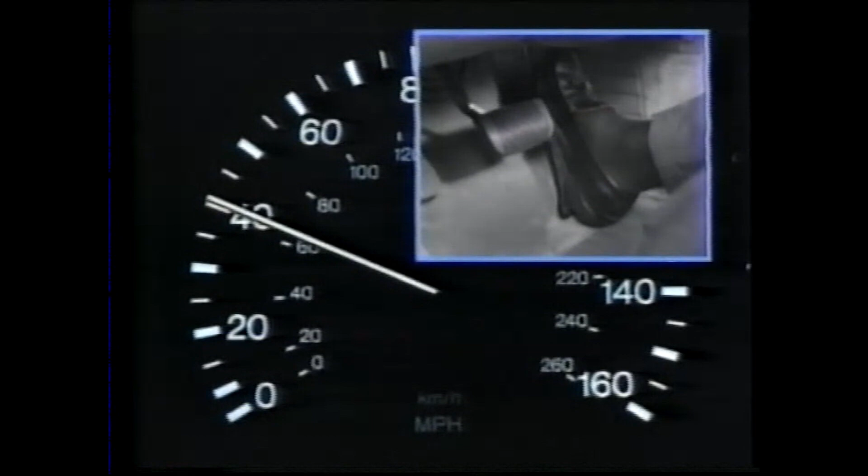Of course, you can also change the set speed by depressing the brake pedal or accelerator pedal to bring the vehicle to the desired speed, and then reset it with the set switch.

If you pull the control lever toward you, operation of the cruise control system is temporarily canceled. In addition, operation of the cruise control system can be temporarily canceled by depressing the brake pedal. In a vehicle with a manual transmission, operation is also canceled when the clutch pedal is depressed.

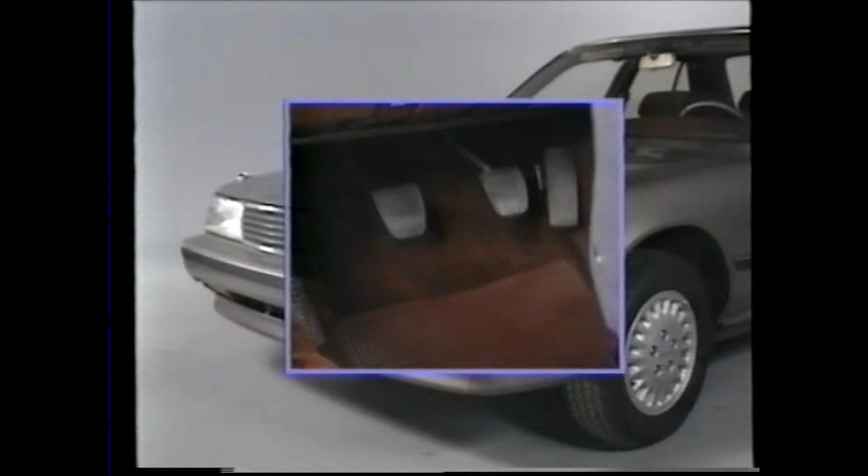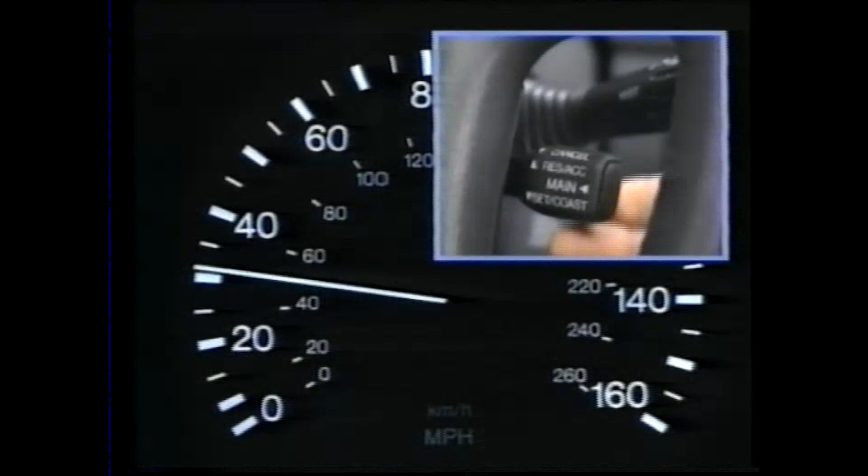Even after cancellation, the set speed remains in the memory, so if you use the resume mode, that is, lift the lever up when you wish to drive again using the cruise control system, the vehicle will return to the set speed.

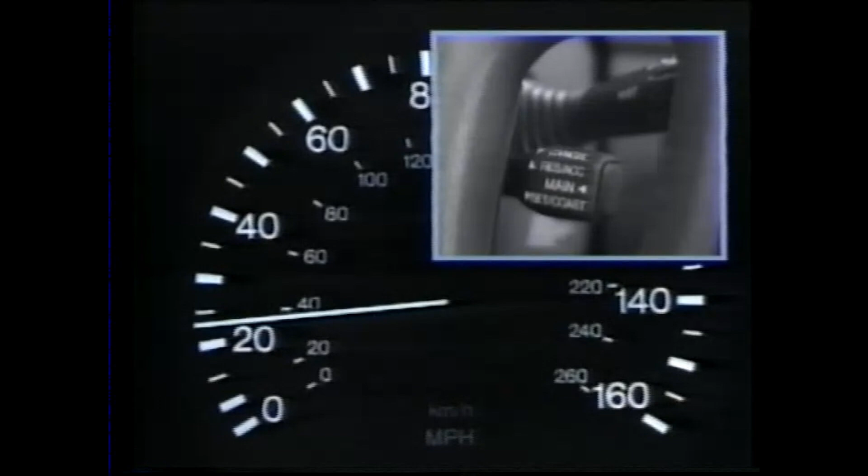However, the set speed will be erased from the memory if the actual vehicle speed falls below 40 kilometers per hour. If this occurs, the resume function will of course not operate.

Let's take a look at the components of the cruise control system. The main components are the cruise control ECU,

the actuator, the main and control switches, the speed sensor, and the combination meter.

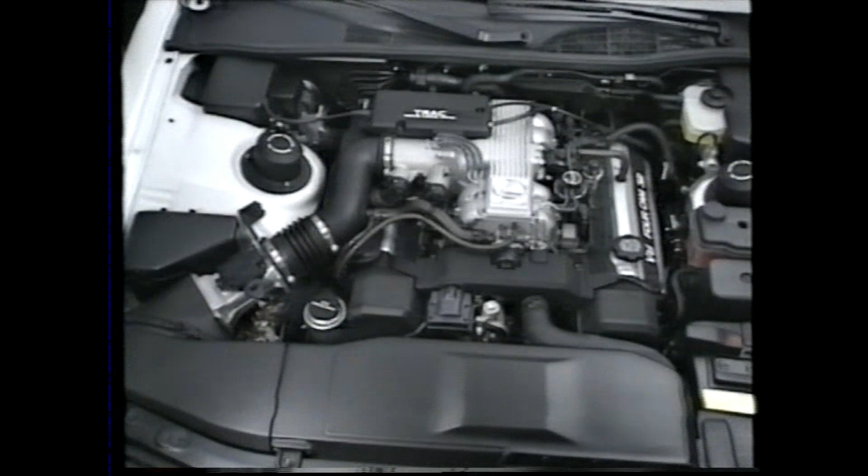The cruise control ECU is located on the left cowl side panel. The actuator opens and closes the throttle valve according to the signals from the ECU.

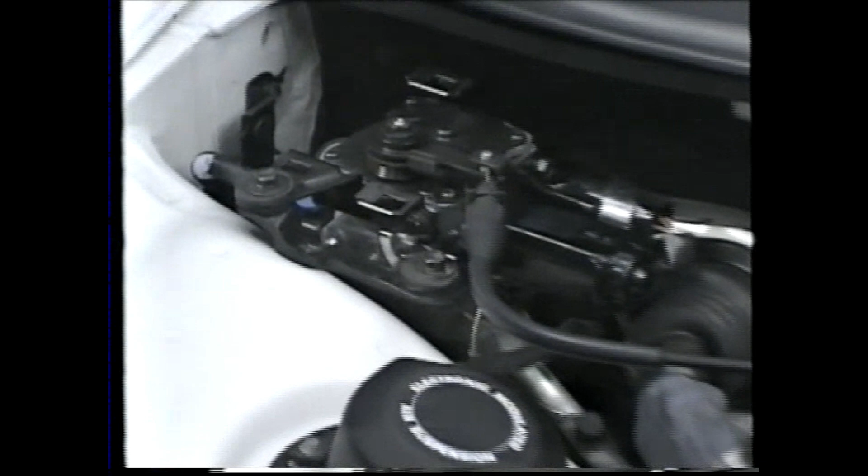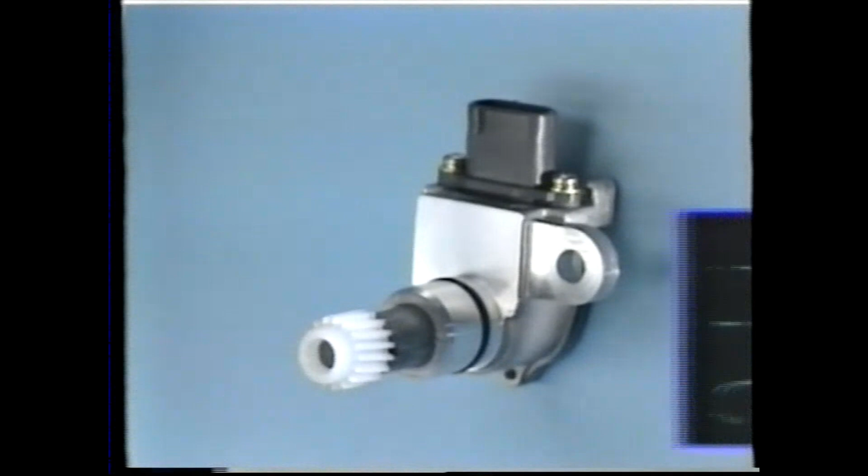The speed sensor generates a signal depending on the speed of the vehicle. 20 pulses from the speed sensor are converted to 4 pulses in the combination meter and sent to the ECU.

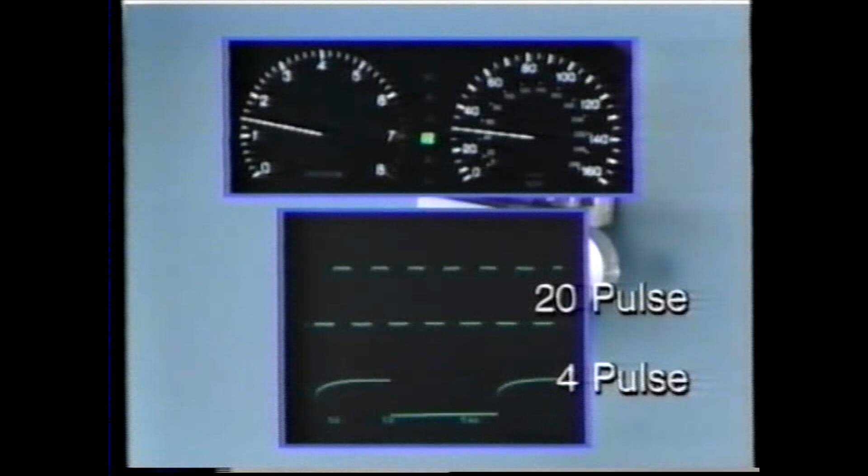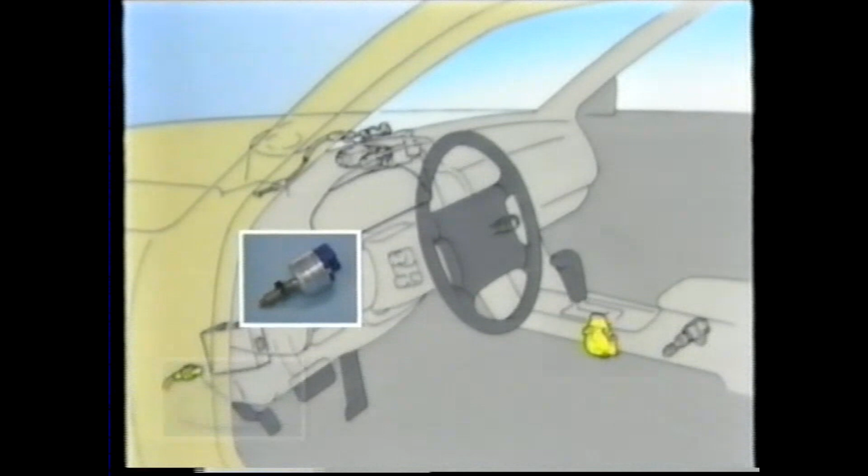In addition, the stoplight switch, the neutral start switch, and the parking brake switch can be considered component parts of the cruise control system because when any of these switches go on, operation of the cruise control is canceled.

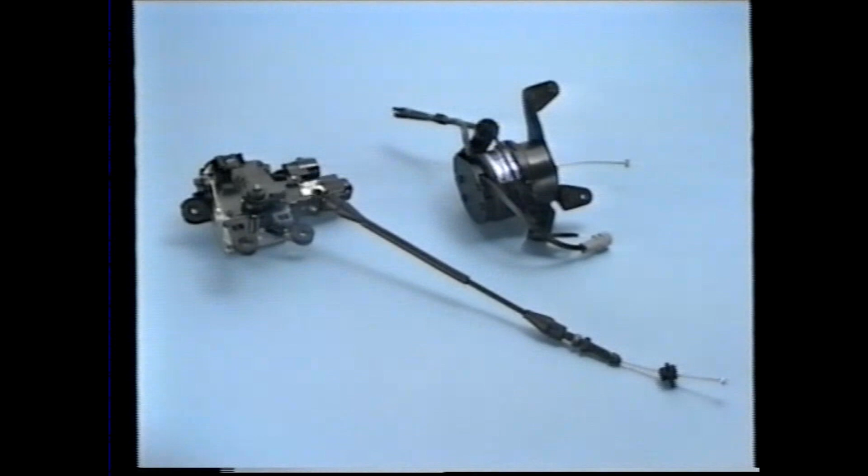Now let's look at the operation of the cruise control system. There are 2 types of actuators, a motor-driven type and a vacuum-driven type.

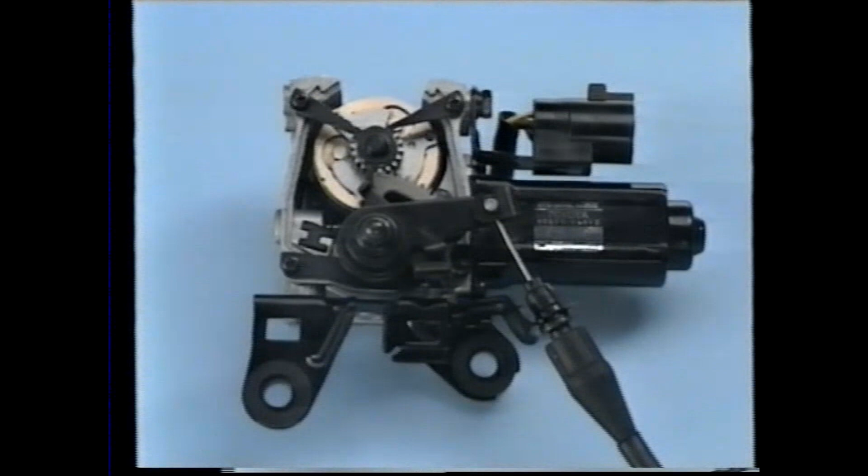The actuator used in the LS400 is the motor-driven type. The motor-driven type actuator is made up of a motor with a safety magnetic clutch, a potentiometer, a control arm, and so on.

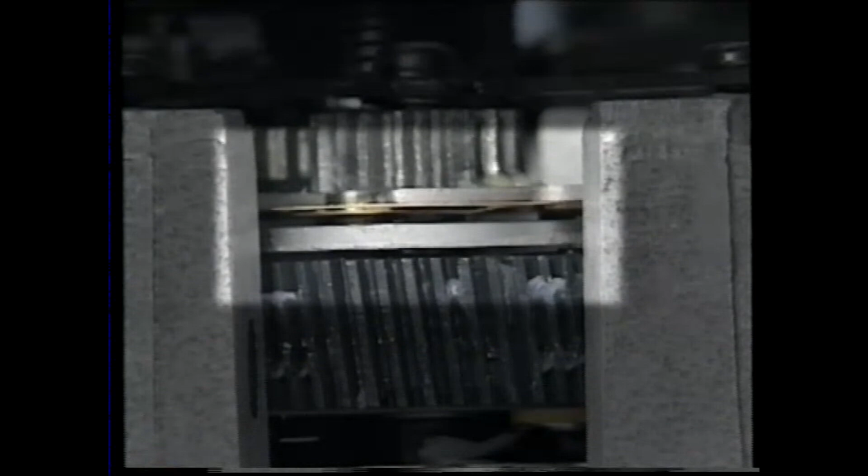The function of the safety magnetic clutch is to connect and disconnect the motor and control arm as necessary. When the cruise control system is switched on, the clutch engages, connecting the motor and control arm when electrical current flows from the ECU.

Also, when the brake pedal is depressed, or when the ECU senses a malfunction in the cruise control system, current to the safety magnetic clutch is interrupted, and the clutch disengages, breaking the connection between the motor and control arm.

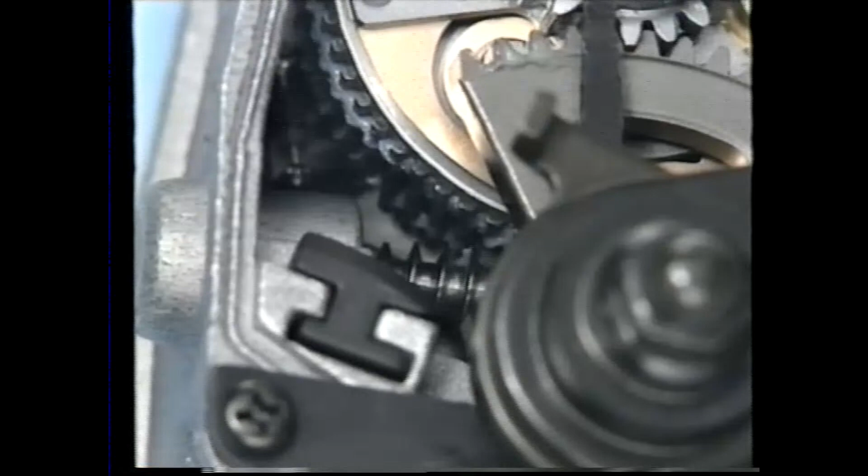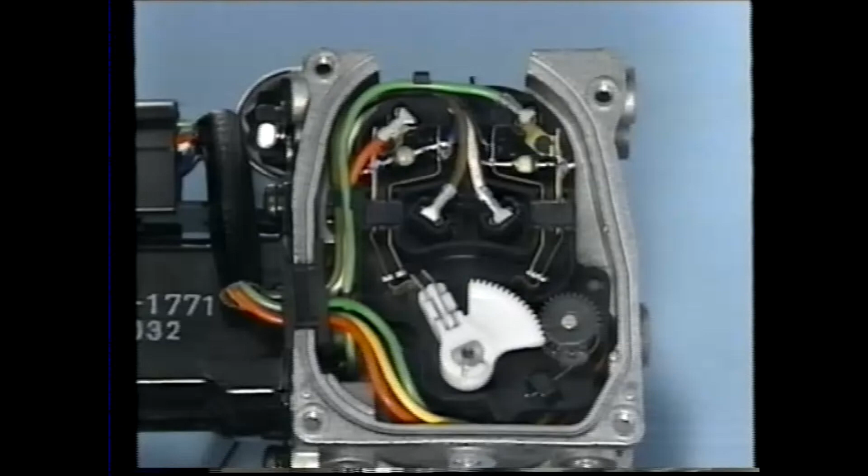The motor rotates in both directions, so it can control both acceleration and deceleration of the vehicle. In addition, there are two limit switches built into the motor to protect it.

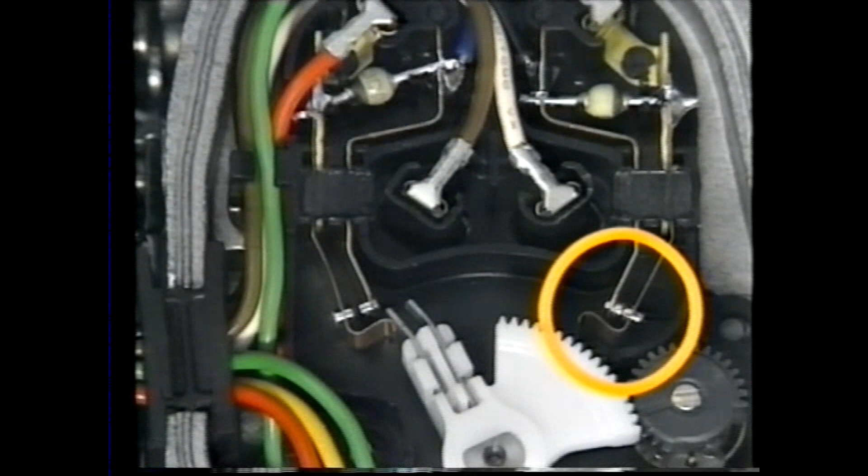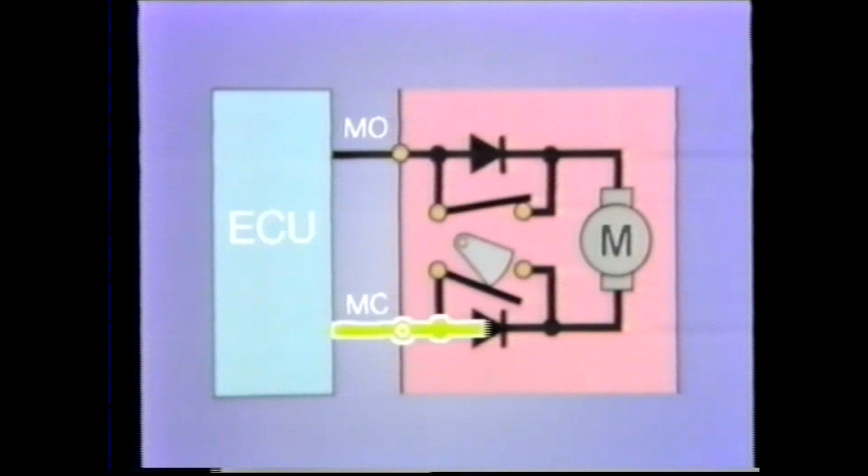When the system is not operating, the limit switch on the MC side is closed, and that on the MO side is open. When the motor begins to rotate in the acceleration direction, the switch on the MO side closes. When the throttle is fully open, the switch on the MC side opens and motor rotation stops. When the motor begins to rotate in the deceleration direction, the switch on the MC side closes. When the throttle is fully closed, the switch on the MO side opens and motor rotation stops.

The control arm is connected to the throttle valve via cables. When the vehicle is not being controlled by the system, the cruise control cable is free. On the other hand, when driving with the cruise control system, the cable connected to the accelerator pedal is free.

The potentiometer detects the opening angle of the control arm. The signal output by the potentiometer is used to control the motor and to monitor the control arm position for the self-diagnostic function.

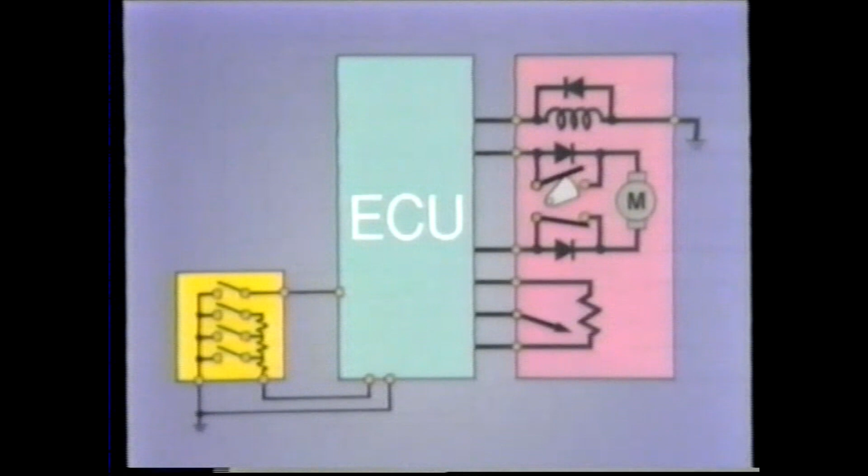Next, let's look at the operation of the cruise control system by means of a circuit diagram. When the main switch is turned on, current flows to the relay in the ECU, and the ECU begins to sense the vehicle's speed. However, current does not yet flow to the actuator motor and safety magnetic clutch.

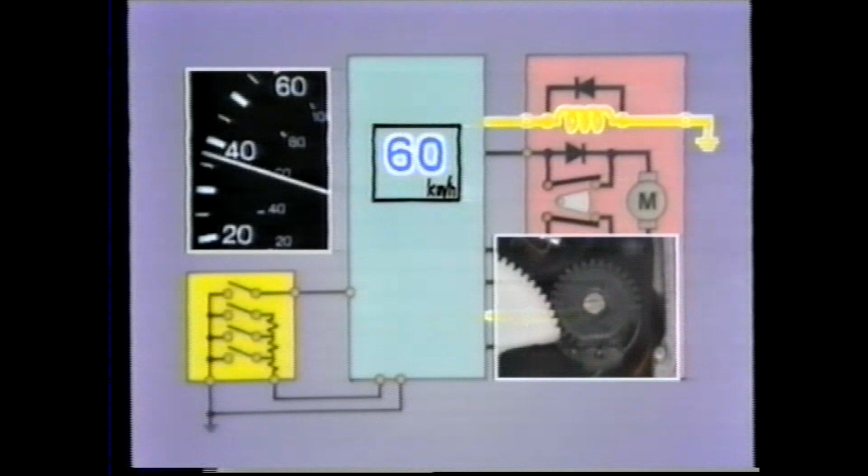The speed is set in the ECU's memory when the set switch is pushed and released. At the same time, the safety magnetic clutch is activated and motor rotation is transmitted to the control arm and potentiometer. At this time, the potentiometer sends a signal to the ECU according to the opening angle of the throttle valve.

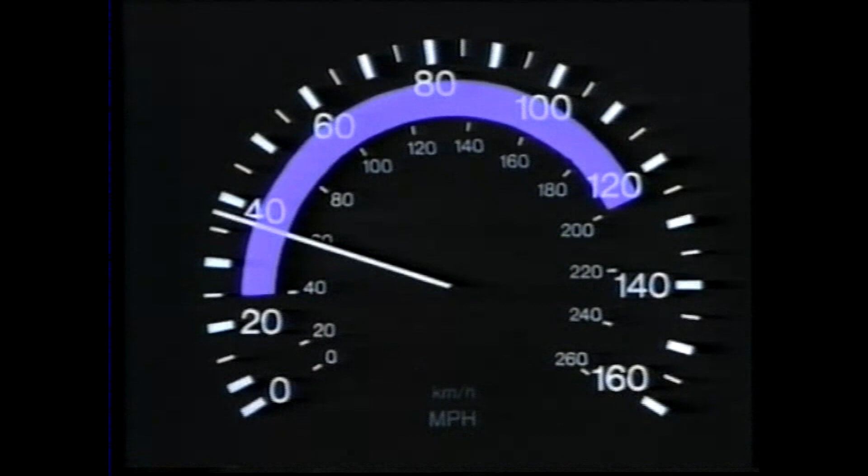Speed can be set anywhere in the range between 40 and 200 kilometers per hour. The ECU compares the actual vehicle speed sent from the speed sensor with the set speed and opens or closes the throttle valve accordingly. For example, if the actual vehicle speed falls below the set speed, it opens the throttle valve, while it closes the throttle valve if the actual vehicle speed exceeds the set speed. By continuously performing this operation, the cruise control system keeps the vehicle at the set speed.

When the vehicle is driven up a hill, its speed will fall. When this occurs, the cruise control ECU sends a signal to the engine and transmission ECU, ordering it to downshift to third gear in order to keep the vehicle at the set speed. When the vehicle returns to the set speed, the transmission upshifts back into overdrive.

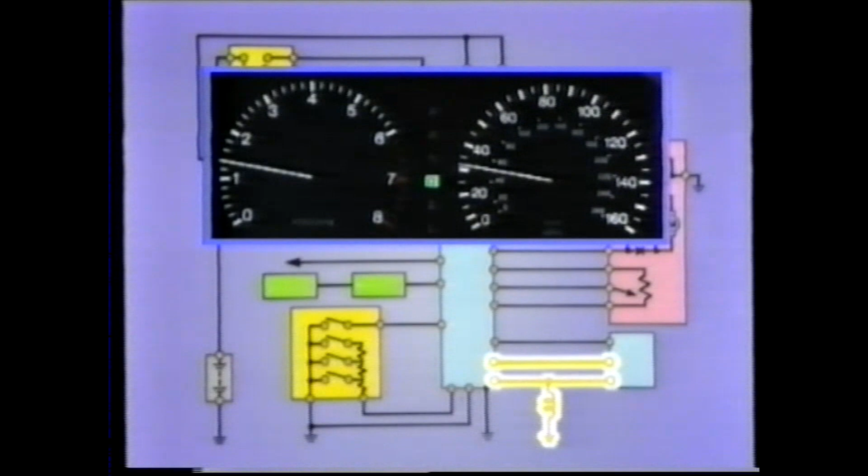Remember that when the cruise control system is operating while the ECT is operating in the power mode, the ECT is automatically switched to the normal mode regardless of the status of the driving pattern select button.

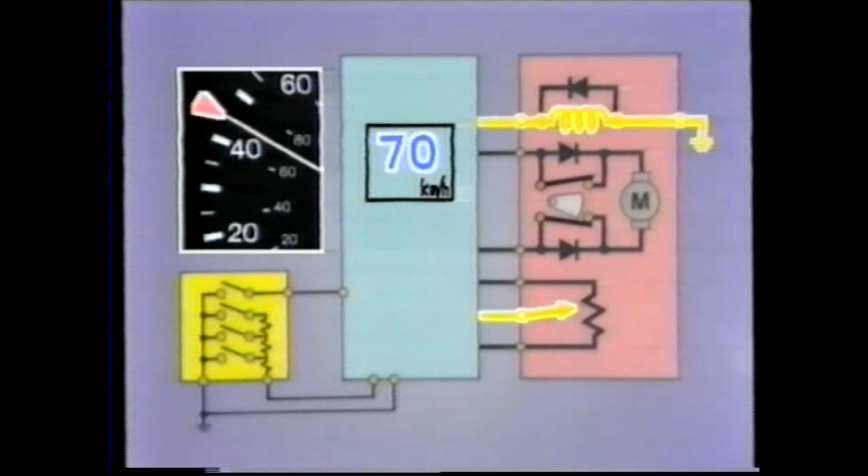In the accelerate mode, the actuator motor rotates in the acceleration direction and speed is increased. When accelerate is turned off, the ECU saves the speed at that moment in its memory as the set speed. In the same way, in the coast mode, the actuator motor rotates in the deceleration direction and speed is reduced. When coast is turned off, the ECU saves that speed in its memory as the set speed.

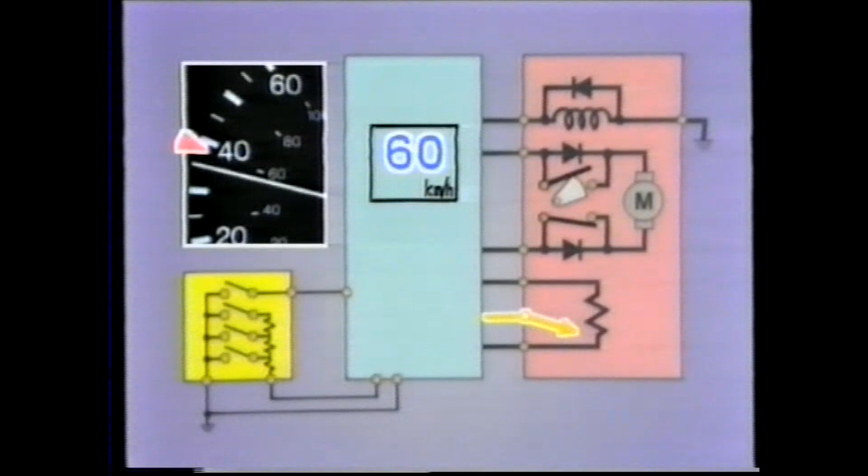When the control lever is pulled toward cancel, the cruise control ECU immediately releases the safety magnetic clutch in the actuator to stop operation of the cruise control system. At the same time, it rotates the motor to fully close the throttle valve.

The cruise control system is also stopped in the same way when a cancel signal is received from the stoplight switch, the neutral start switch, or parking brake switch.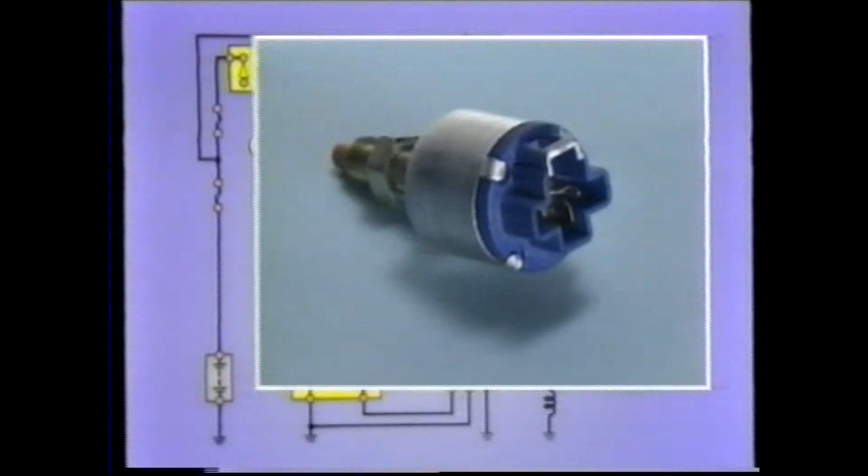There are actually two switches in the stoplight switch, which control two different functions at the same time. One switch goes on when the brake pedal is depressed, not only to turn on the brake lights, but also to tell the ECU that the brakes have been applied so that the ECU can stop operation of the cruise control system.

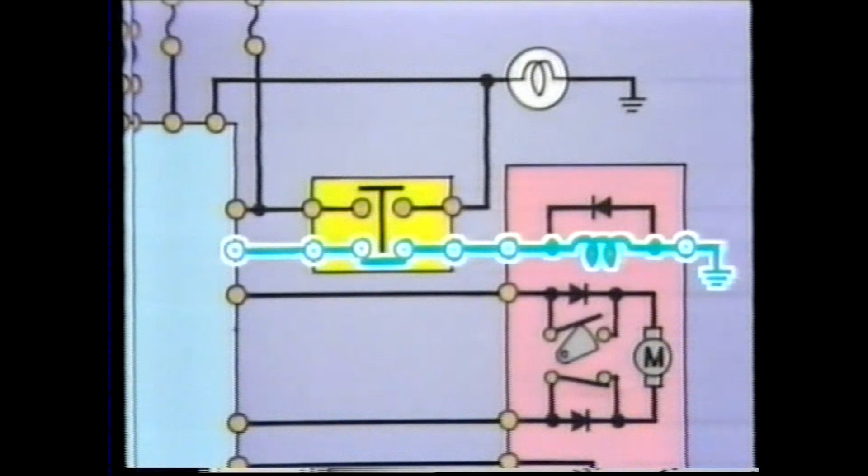The other switch mechanically cuts the circuit between the actuator's safety magnetic clutch and the ECU and disengages the clutch to stop control by the cruise control system. At this time, the set speed is still saved in memory so that the original set speed is resumed if the resume switch is turned on and then released.

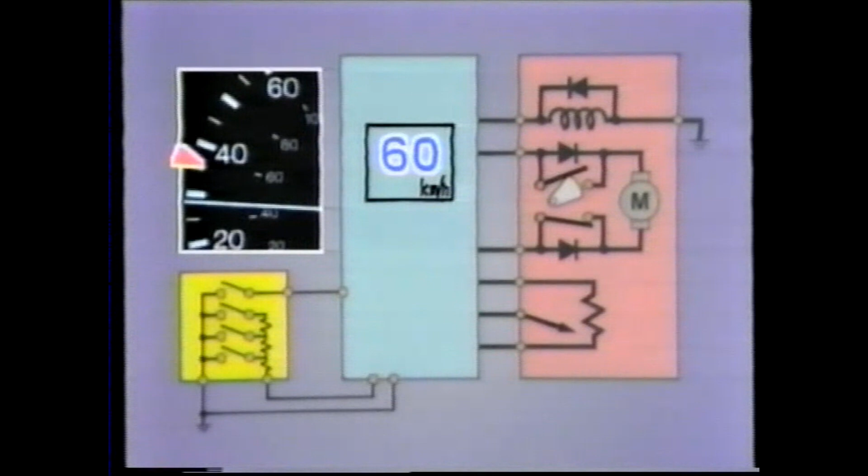Once the actual vehicle speed falls below 40 kilometers per hour, operation is canceled and the set speed is erased from its memory.

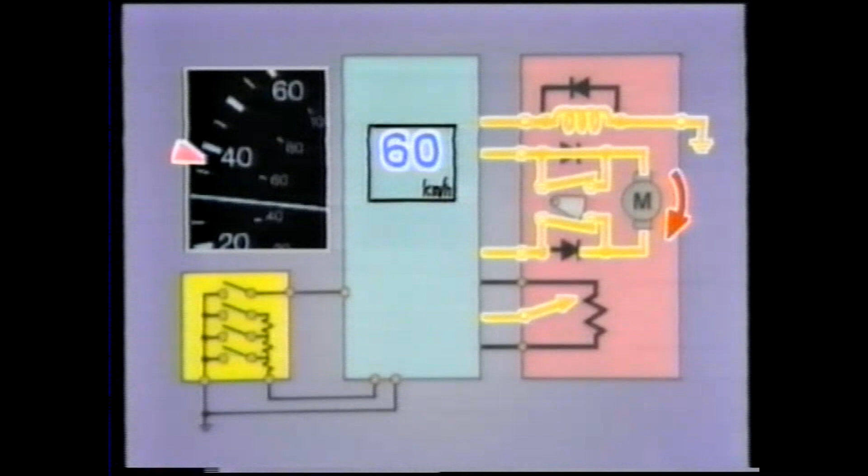In addition, if the actual vehicle speed falls 16 kilometers per hour below the set speed while the cruise control system is in operation, operation of the system is canceled and the set speed is erased from its memory. The resume function is not effective at this time.

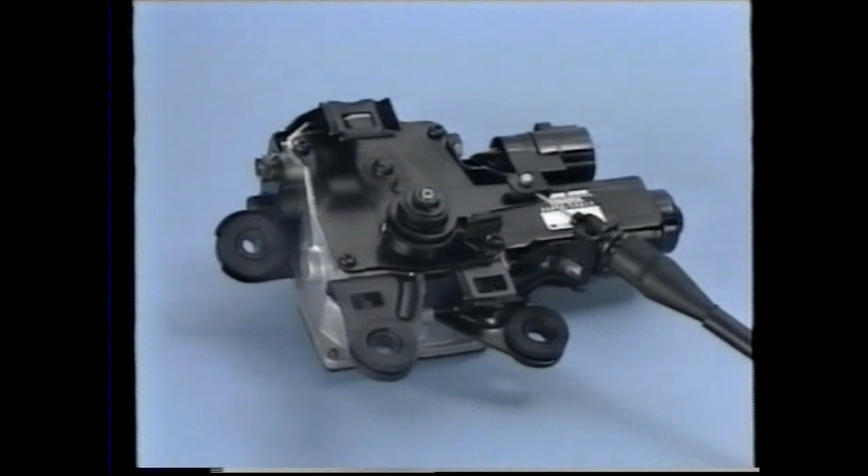The foregoing has been an explanation of the motor-driven type actuator. Now let's take a short look at the operation of the vacuum-driven actuator.

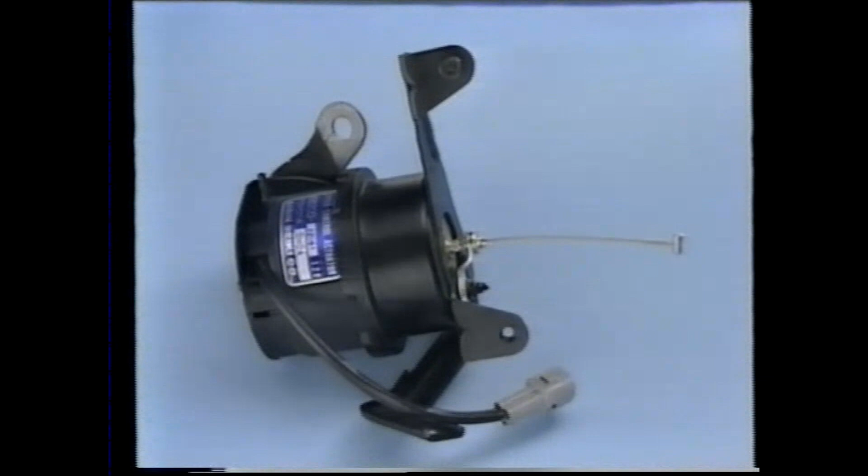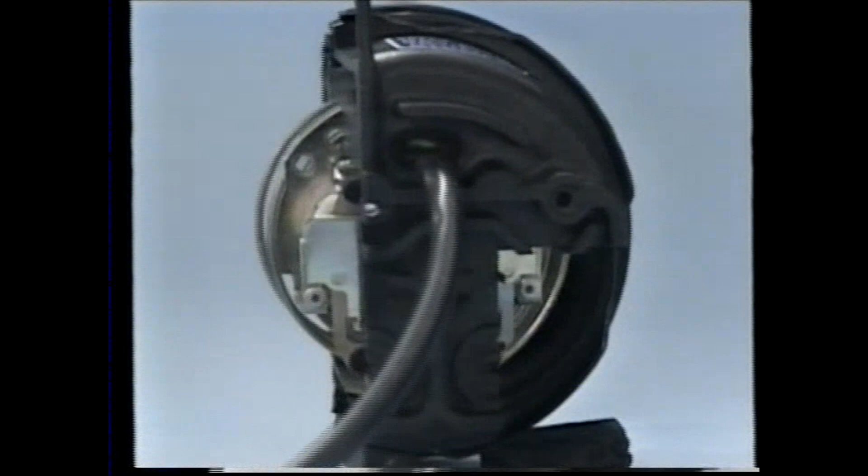The vacuum-driven actuator has a control valve, a release valve, a diaphragm, and a return spring. The control valve is used to draw either atmospheric air or vacuum into the actuator. When current flows to the control valve, the passage through which atmospheric air flows is closed, and the passage for intake manifold vacuum is opened, creating a vacuum in the actuator.

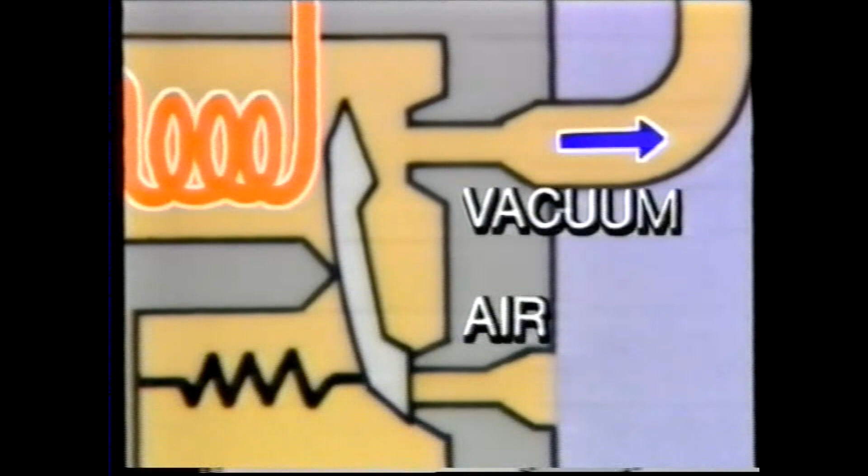When the strength of the vacuum exceeds the force of the return spring, the diaphragm moves inward. As a result, the throttle valve connected to the diaphragm via a cable is opened and the vehicle accelerates.

When current flow to the control valve stops, atmospheric air enters the actuator. The diaphragm is therefore pushed back by the return spring and the throttle valve is closed. The strength of the vacuum in the actuator is regulated by the length of time that the current flows to the control valve.

The ECU compares the actual vehicle speed with the set speed and varies the ratio of time that this current flows in order to regulate the opening angle of the throttle valve.

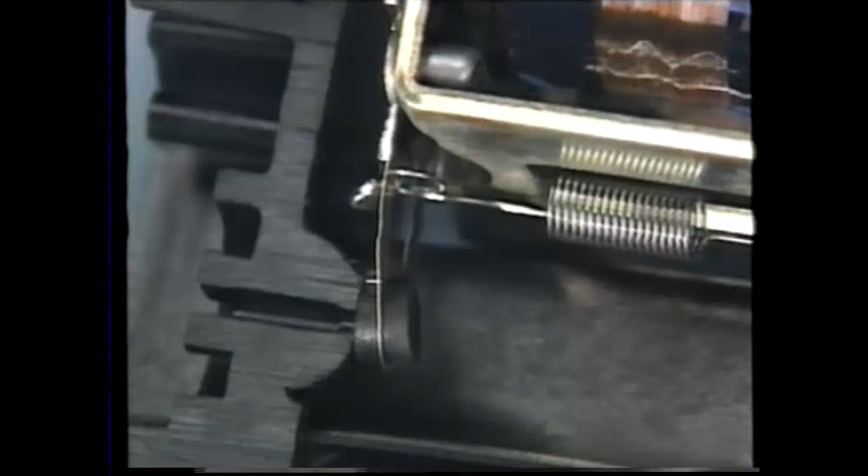When operation of the cruise control system is canceled, the release valve lets atmospheric air into the actuator, causing the throttle valve to close instantly.

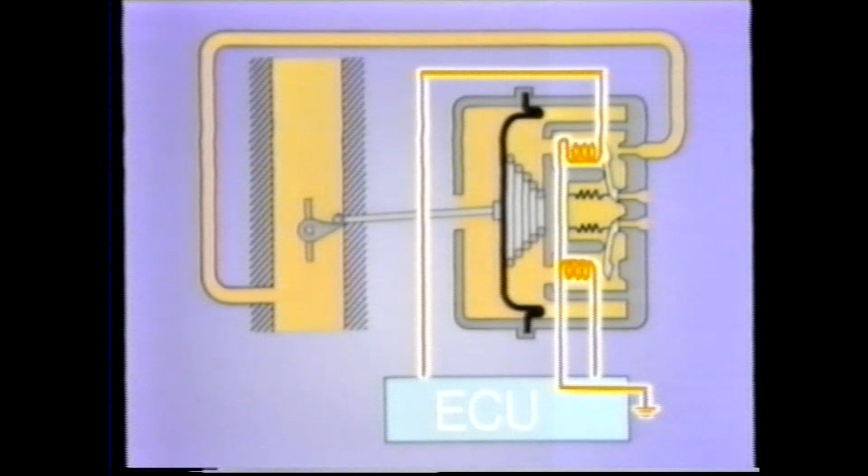When current flows to the release valve, the passage for the flow of atmospheric air is closed. When the operation of the cruise control system is canceled, current to the release valve and control valve stops and atmospheric air enters the actuator. As a result, the diaphragm is pushed back by the return spring and the throttle valve is released.

The cruise control system has a self-diagnostic function. If no signal comes from the speed sensor and the ECU detects a system malfunction, cruise control system operation is canceled and the indicator light blinks 5 times, then turns off in order to inform the driver of the system malfunction.

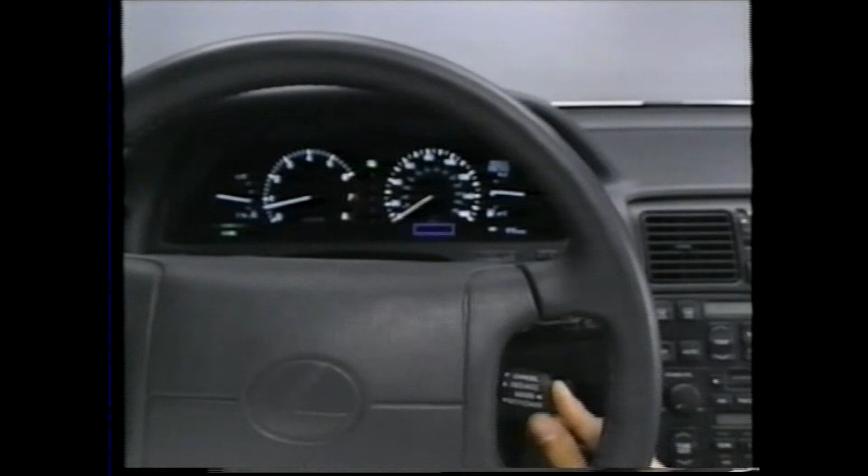The cause of the malfunction is saved in the memory of the cruise control ECU. At this time, the cruise control system does not operate even if the main switch is turned on. However, once the ignition switch is turned off and then on again, the system will operate when the main switch is pressed again.

The cruise control ECU of the LS400 has a backup power source, so the cause of the malfunction will remain in the ECU memory even if the ignition switch is turned off. On other models, it is erased when the ignition switch or main switch is turned off.

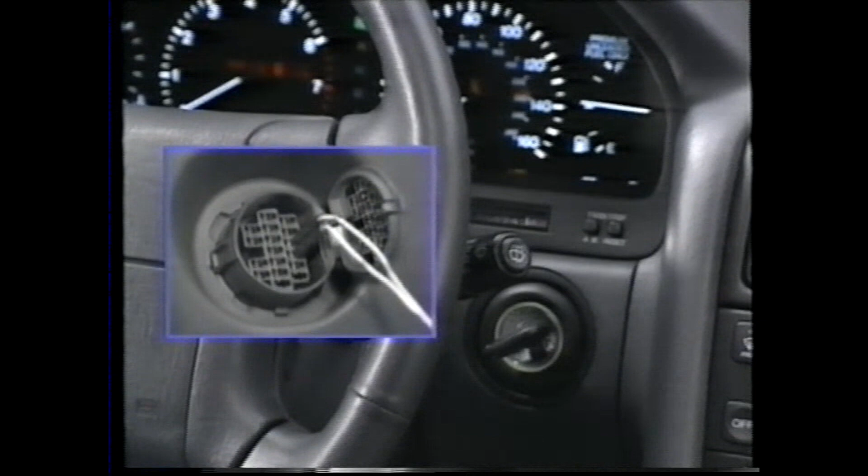With the ignition switch on, connect terminals TC and E1 of the TDCL or check connector. This will allow you to find out the cause of the malfunction by counting the number of times the indicator light blinks.

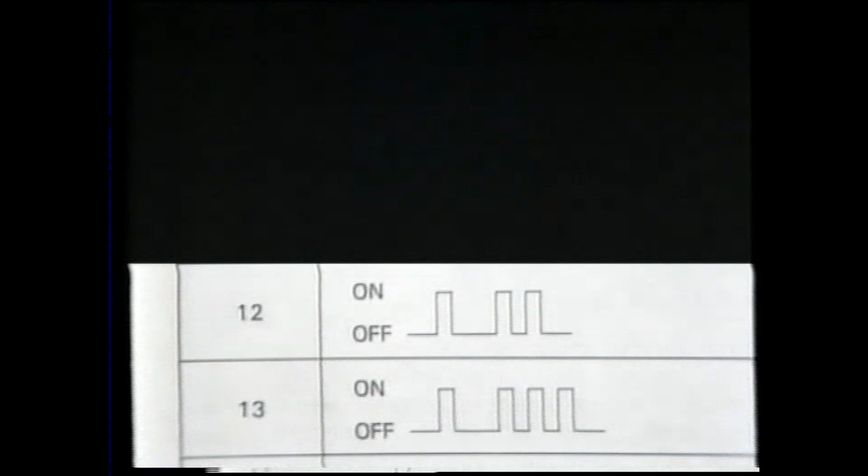Here you see codes 12 and 13. Code 12 means open circuit in the safety magnetic clutch, and code 13 means potentiometer output signal is abnormal, or open circuit in the motor output circuit.

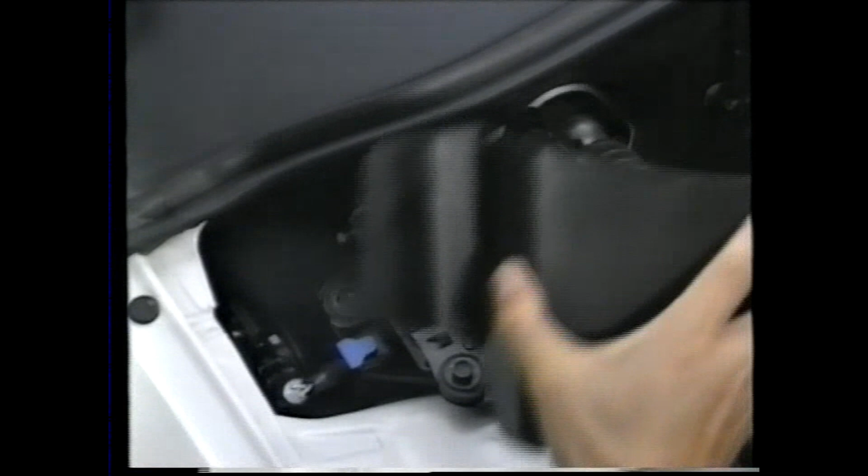Let's check the actuator. As you can see, the connector is not connected. After remedying this, remove the dome fuse to clear the memory.

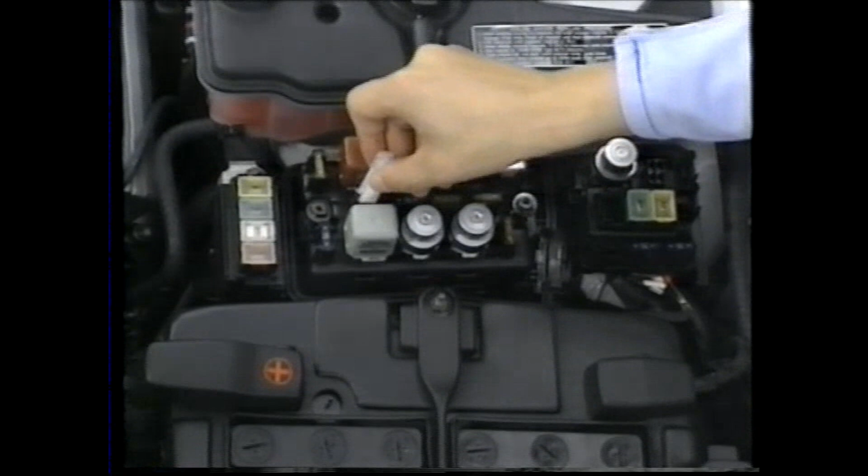Now look at the diagnostic codes again. The normal code is now shown.

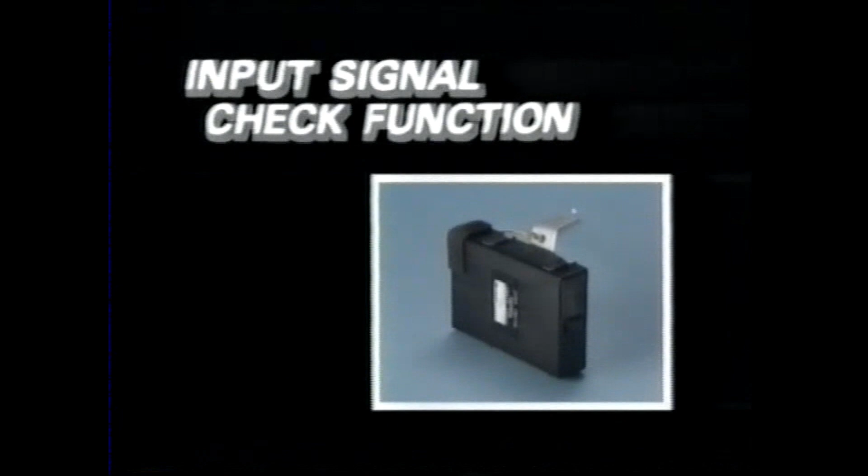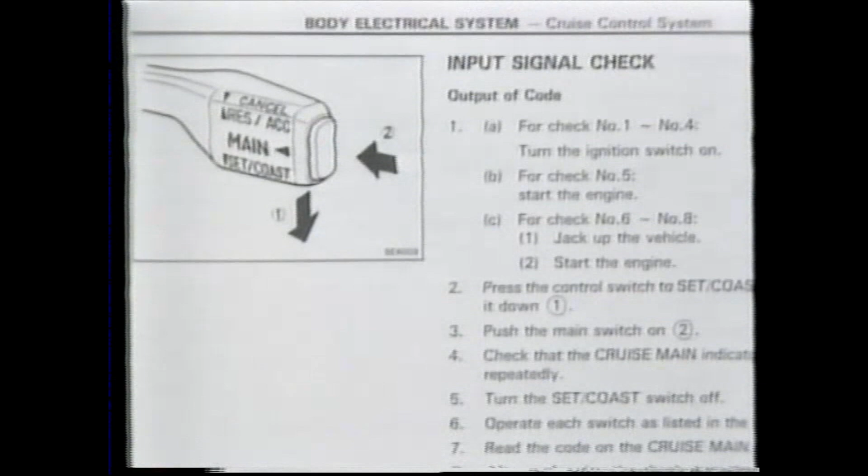The cruise control ECU also has an input signal check function. Let's take a look at that now. This function checks whether or not signals for all control switches and the stoplight switch, parking brake switch, neutral start switch, and speed sensor are being input correctly into the ECU.

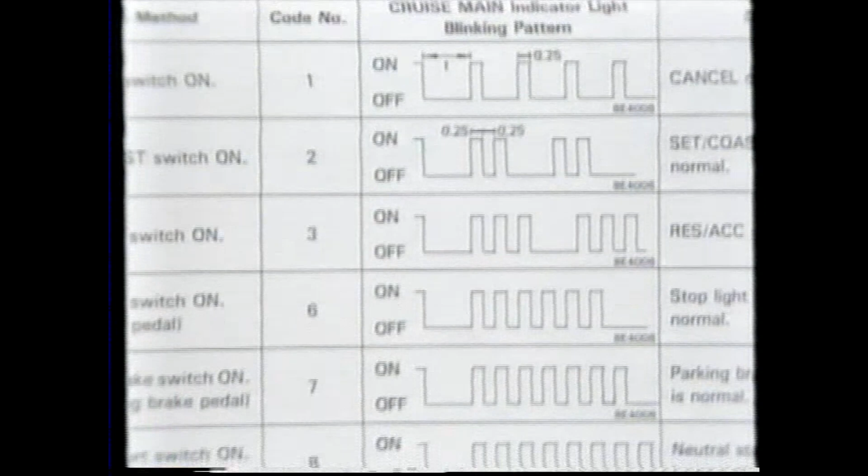Let's try it. Turn the ignition switch on and turn on the main switch while pushing the control lever down, that is, turning on Set Coast. At this time, the power indicator light blinks twice. This sets the ECU in the input signal check mode.

First, pull the control lever toward cancel and hold it. If there is no malfunction in the cancel switch circuit, the power indicator light will blink once. And it blinks twice when you push the control lever towards Set Coast.

Next, it blinks 3 times when you push the control lever toward Resume Accelerate.

It blinks 6 times when the brake pedal is depressed. Next, jack up the vehicle and start the engine. If everything is normal, the light blinks 7 times since the parking brake has been depressed. When we release the parking brake, it blinks 8 times.

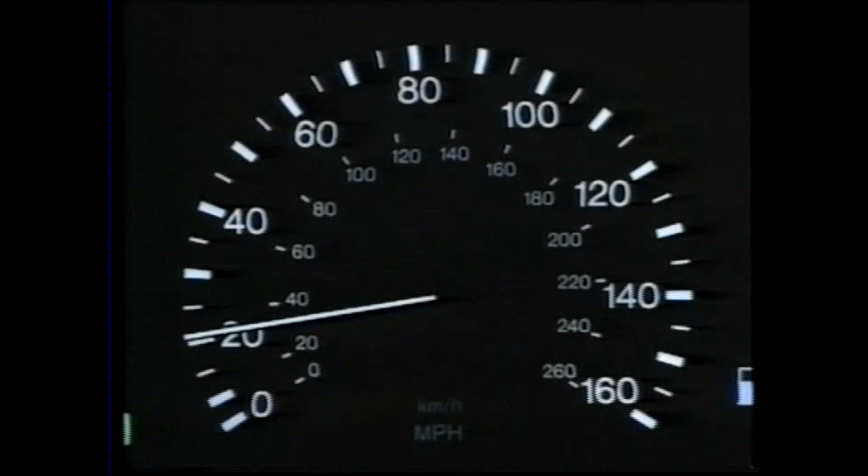The reason for this is that the shift lever is in the N or P range. If we shift to the D range, it remains lit. When we drive at 40 kilometers per hour or faster, it begins blinking, so the speed sensor circuitry is normal.

When the main switch is turned off, the input signal check mode is canceled. The foregoing was an input signal check.

The LS400 also has a cancel signal check function. The ECU stores the cancel signal that last canceled the operation of the CCS, so you can find out the cause of the cancellation by checking which cancel signal is in the memory.

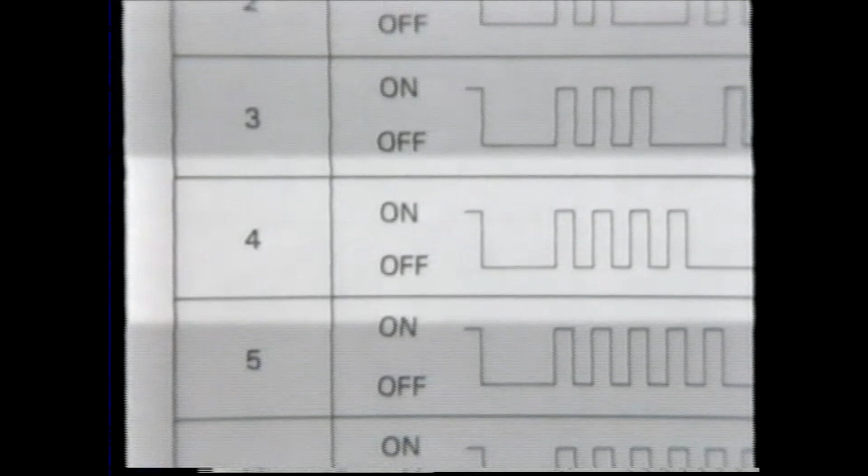Let's try it. Turn the ignition switch on, then turn the main switch on while pulling the control lever toward you. The cancel signal is indicated by the blinking pattern of the power indicator light. This blinking pattern means that operation of the system was canceled by the stoplight switch signal. If the main switch is turned off, this display disappears.

Now let's take a look at the cruise control system checker. The CCS checker can be used for off-vehicle diagnosis. It can be used to check the operation of the power supply, the main switch, the indicator light, the input signals, and the actuator.

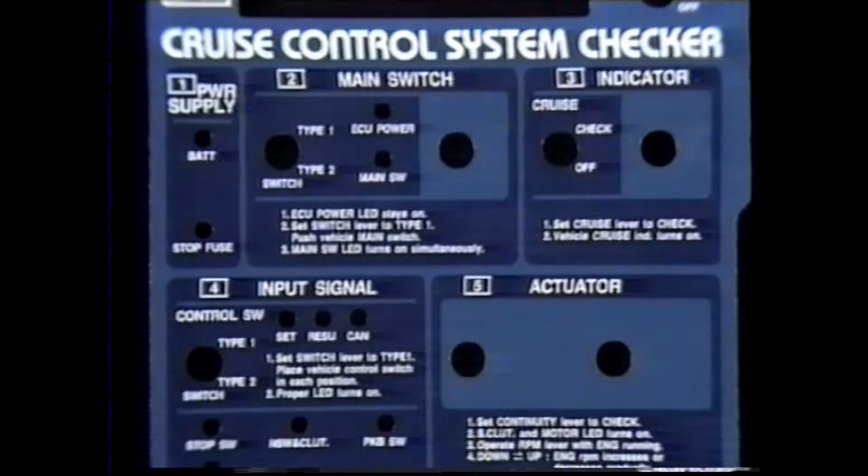Let's look at the circuits that can be checked on the diagram. First is the power supply. The circuit from the battery to the ECU battery terminal, and the circuit to the ECU STP Plus terminal can be checked.

Next is the main switch. The circuit from the ECU CMS terminal to the ground point can be checked. And then, with the ignition switch on, the ECU B terminal circuit from the battery can be checked.

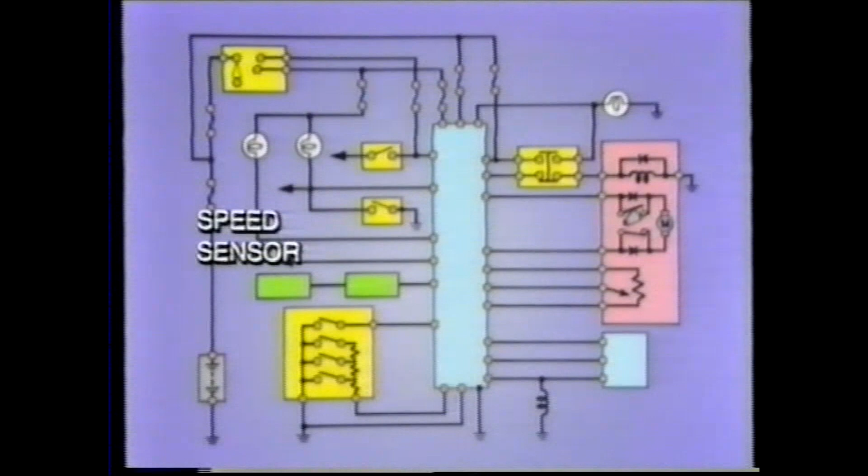For the indicator, the circuit from the battery to the ECU PI terminal via the cruise control main indicator light can be checked. For input signals, checks of the circuits of the cruise control switch, the stoplight switch, the neutral start switch, and the parking brake switch, and of the speed sensor signal circuitry, and so on, can be made.

On-board diagnosis of the actuator circuit is not possible, so here we'll check it using the CCS checker.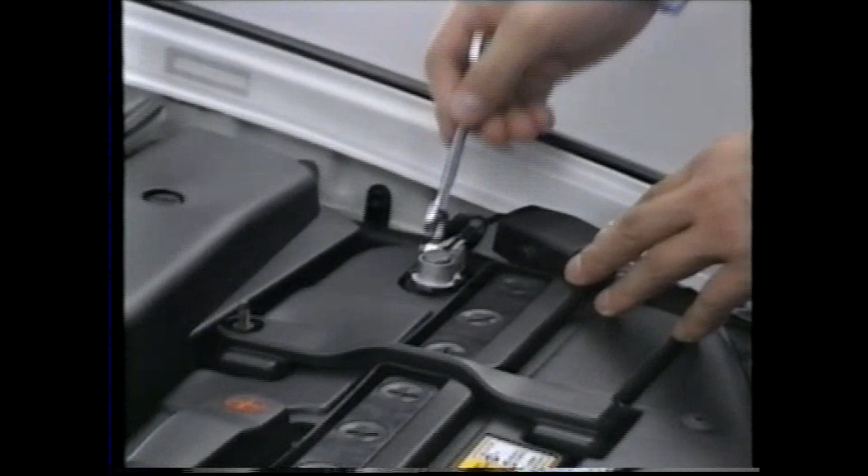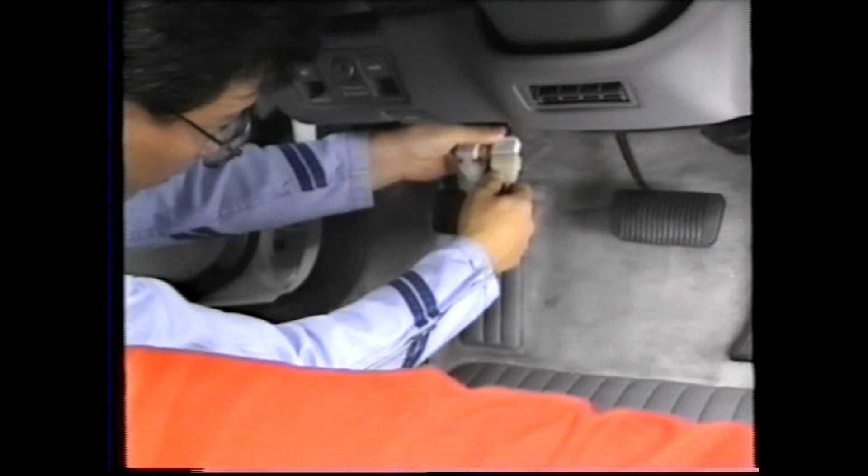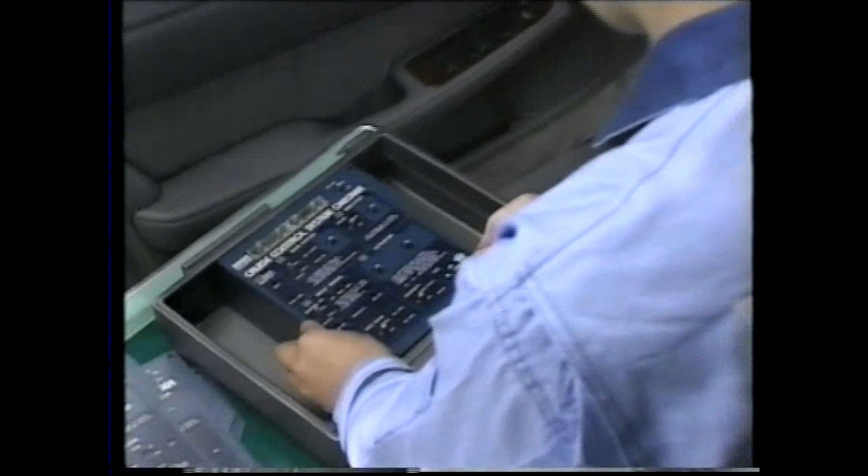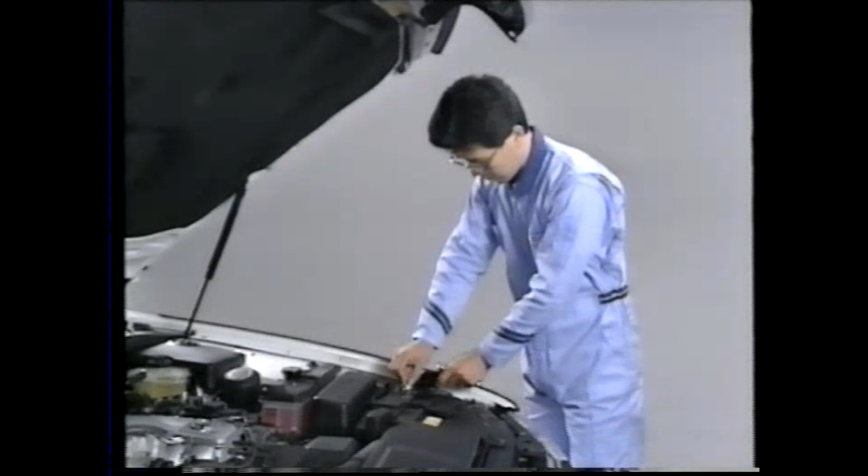First, remove the negative battery terminal. Next, disconnect the wire harness from the cruise control ECU and connect the sub-wire harness to the wire harness. Lay the LS400 checker sheet over the CCS checker and connect the sub-wire harness. Now connect the negative battery terminal, and that finishes our preparations.

First, make an LED check to see if the checker itself is okay or not. Set the LED test switch to test. If all LEDs light up, it is okay.

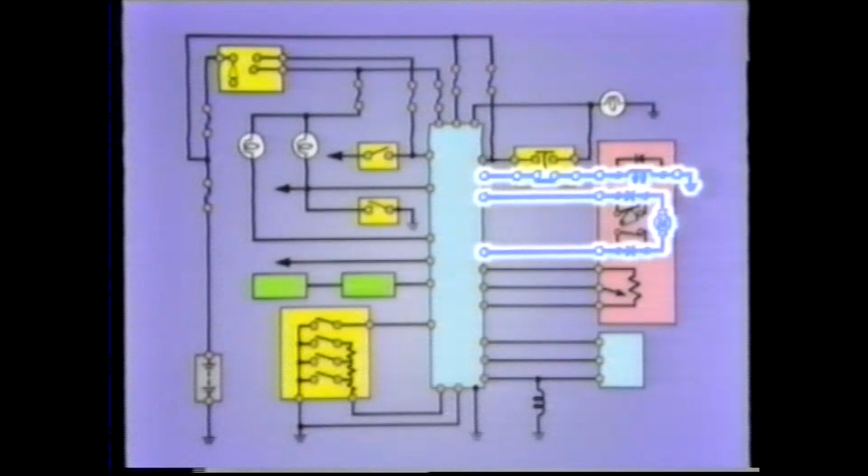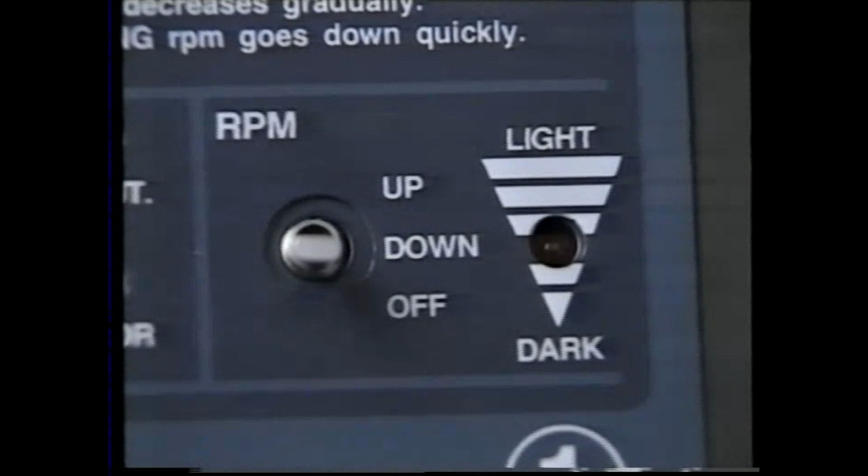Now check the operation of the motor and safety magnetic clutch. Turn the ignition switch on. Confirm that the RPM switch is in the off position and set the continuity switch to check. If the S clutch and motor LEDs light up at this time, the circuit is normal.

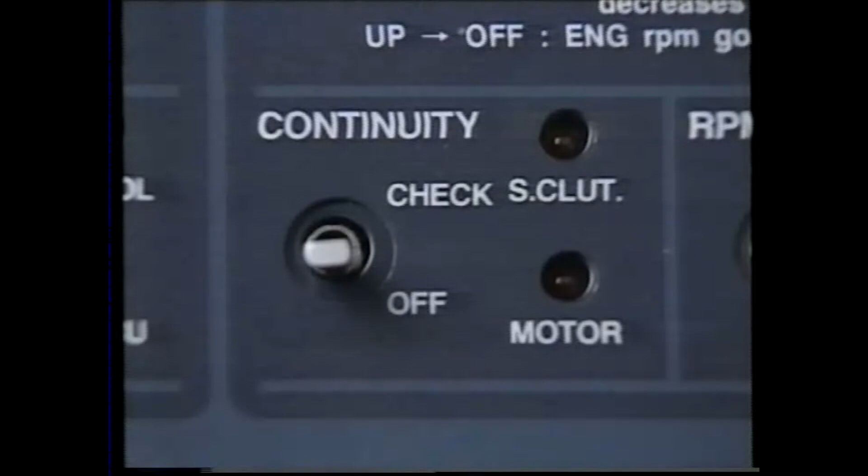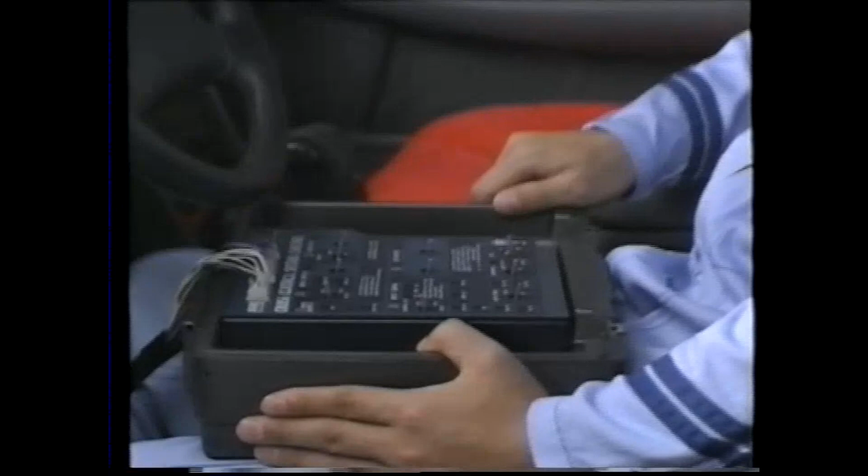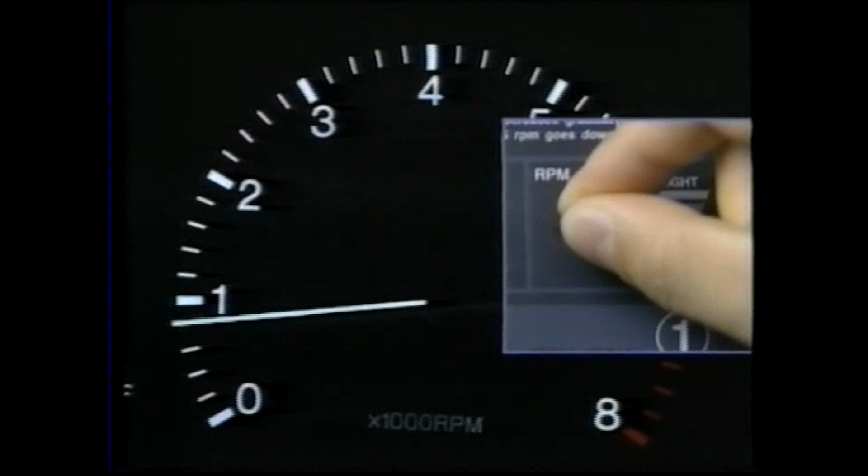Next, start the engine and check the operation of the motor and safety magnetic clutch. With the RPM switch set to up, they are normal if the engine RPM increases. When it is set to down, they are normal if the engine RPM decreases gradually. Be careful: the tachometer should not go into the red zone when doing this test.

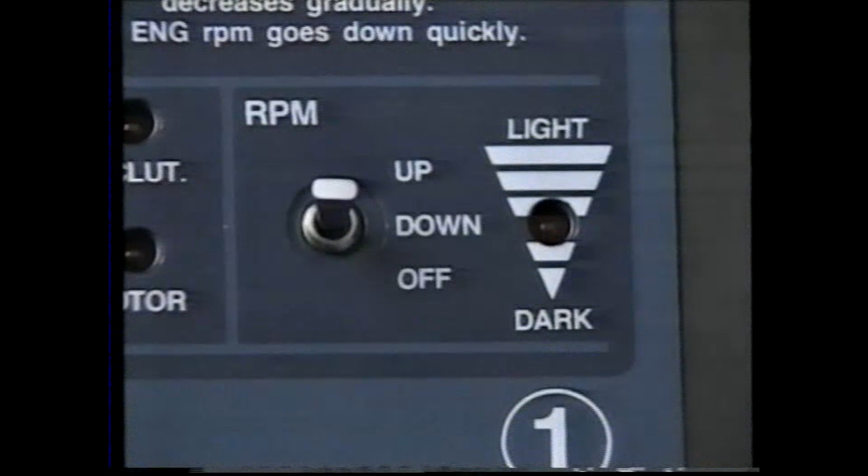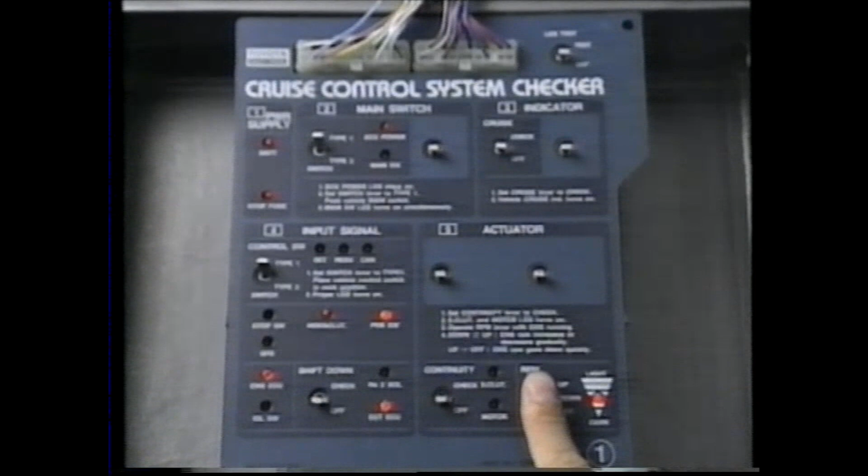Next, check the operation of the motor, potentiometer, and safety magnetic clutch. When the RPM switch is set to up, the operation of the actuator is normal if the actuator lever opens the throttle valve and the checker LED gradually grows brighter. When it is set to down, they are normal if the actuator lever closes the throttle valve and the checker LED gradually grows dimmer.

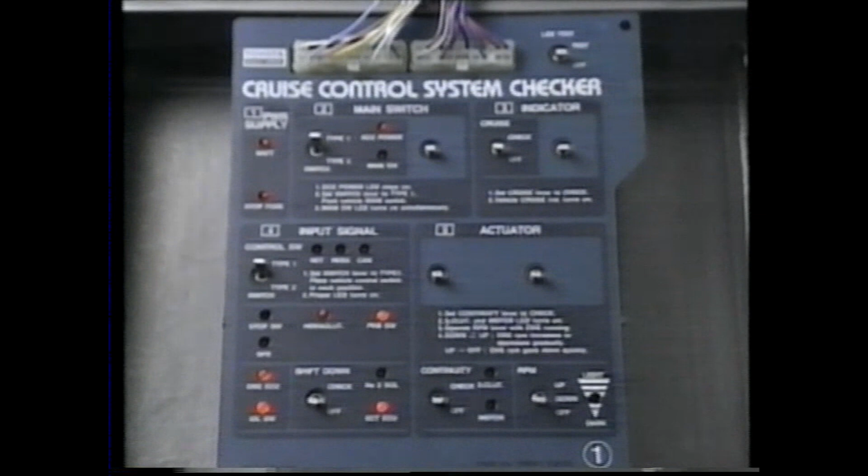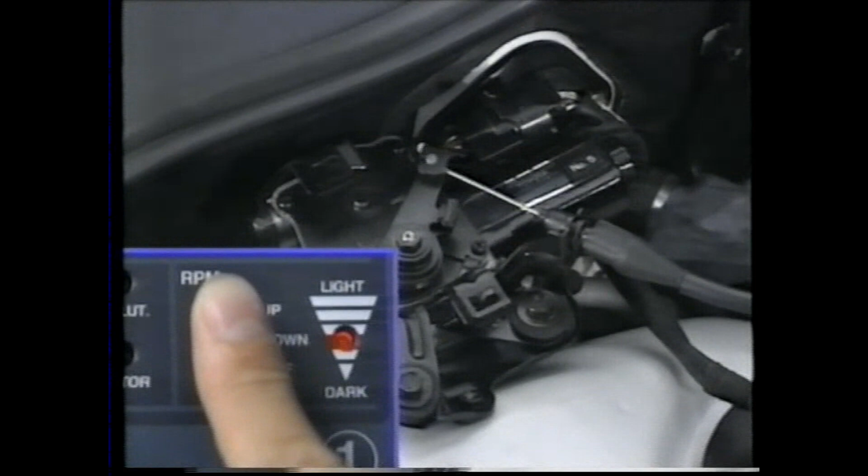Next, set the RPM switch to up, then turn it off. If the actuator lever suddenly closes the throttle valve when you do this and the checker LED goes out, the motor, potentiometer, and clutch are normal. This ends the checking of the operation of the actuator using the CCS checker.

In this video, we learned how the cruise control system is constructed, how it operates, and how the diagnostic system works.